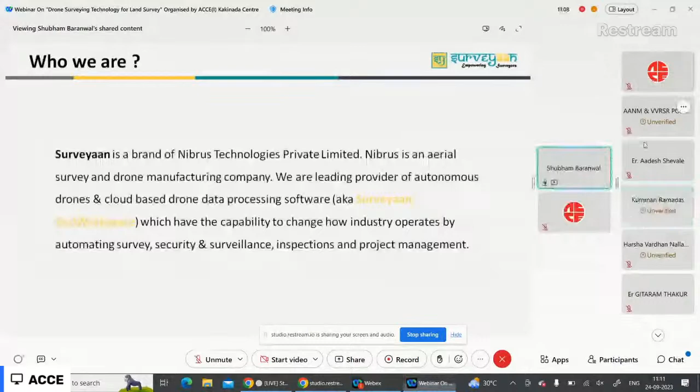Now, coming to this presentation, I would be talking about what drones are, how they are helpful over your traditional methods, what types of drone you need to choose when you are doing a land survey, and what the outputs are and how we can use them in our day-to-day work, mostly in AutoCAD. Fine.

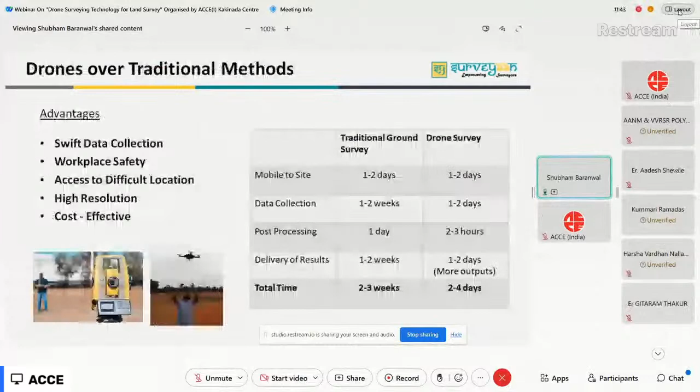So, as Durga sir already told about the traditional methods, there are several advantages of drones over total stations and DGPS. So this is a chart which we have prepared, and this shows that the drone works 10x faster than your traditional methods.

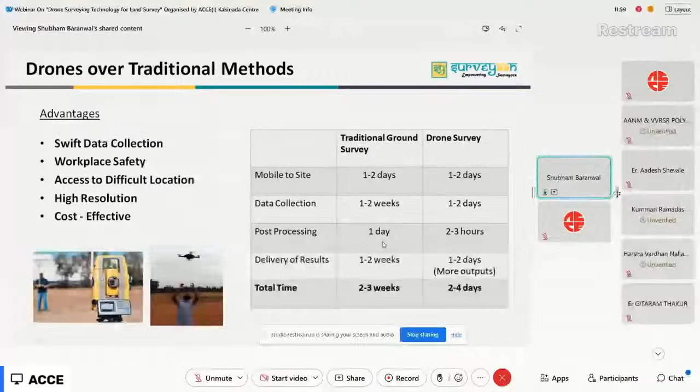The first thing is the data collection. It is where the difference comes in. Let's say for 100 hectares, you may need to work for 1 to 2 weeks to collect the data point by point, using total station or DGPS. Whereas this data through drone can be collected within hours only. Then to post process this data, you take another 1 or 2 days. Whereas this 100 hectares of data can be processed in maybe 1 hour or 2 hours.

And then the most important thing is the delivery of results. So to prepare the results, you need to plot everything in AutoCAD, and then you need to deliver it to clients. In drone survey, we get the outputs automatically with a very few clicks of a button.

Sir, some of the participants are requesting a little louder voice, sir. Okay. Is it fine now? Right, sir, carry on. Okay.

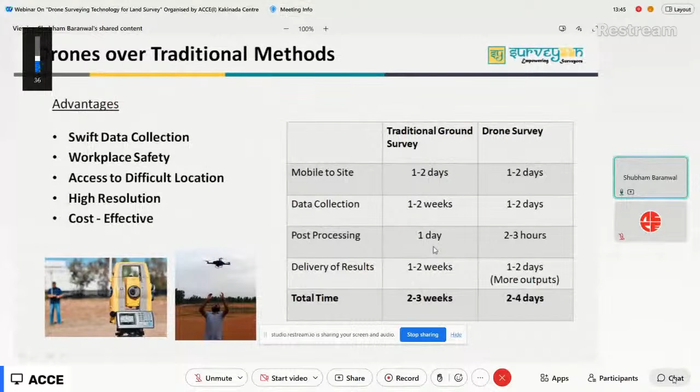So I'll just repeat. Sir has already told about what are the advantages of drone. Now I would just tell you where the difference lies between the drone survey and the traditional ground survey. The main difference lies in the data collection part. So when you go for a traditional method, let's say for a DGPS, you need to set a base, it takes many hours, and then you need to take points manually using a rover. Same is the case for the total station.

Whereas in drone survey, you set up the drone in less than 5 minutes, you plan the survey and you fly the drone. It would fly and capture data within few hours only. Then the delivery of result is where the main time goes. A person needs to do post processing manually, deliver the results, and plot everything on AutoCAD. Whereas in drone survey, the outputs and all the contours come automatically. So this is where the difference lies.

Definitely what sir has told is that data can be collected very fast. One important thing is the surveyors don't need to climb hazardous places or difficult terrains. They can fly drones safely, and the resolution produced by drone survey is 100x more than what we get from the traditional survey. And with all these advantages, we save our time, and ultimately this is cost effective.

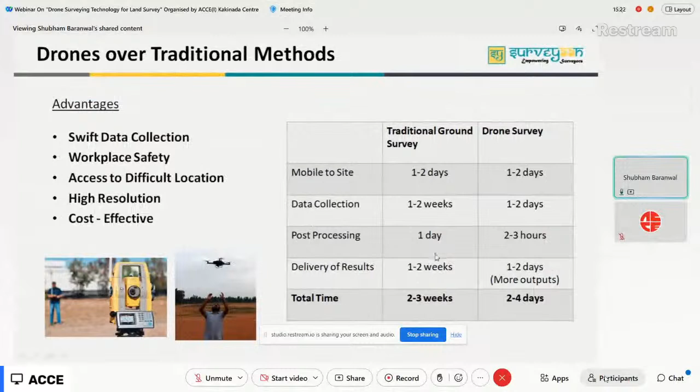Now coming to how this whole system works. You may find that drone survey is a very advanced technology, but we have made it so simple that you can set up the drone in less than 5 minutes. Then you generally have a ground control station software through which you upload your KMLs, plan the drone, control the drone, and ask the drone to fly. Then the drone automatically flies the planned mission. It collects the data automatically.

The data here means the drone collects photos. The drone acts only as a data collection medium, and the rest is done by the photogrammetry software. So the drone flies its designated path and collects the photos. Once the drone completes its mission, it lands back at its takeoff location. Now the surveyor has to come to the office, transfer the data, and upload it to a photogrammetry software, which I will explain later. And then he starts processing and gets the result. This is very simple.

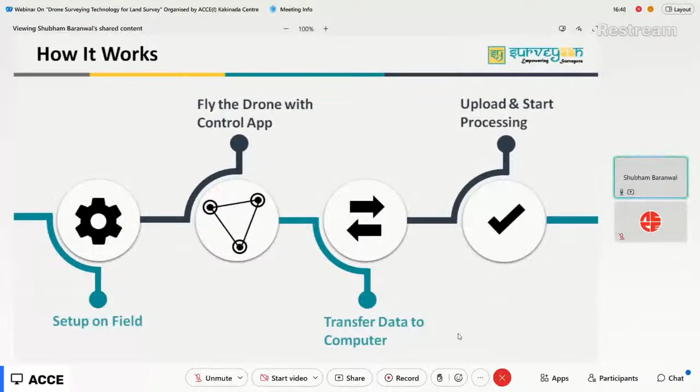So now I'll come to the type of drone you need to choose for land survey. First of all, make sure the drone is lightweight and capable of capturing more area in less time. Our survey drone can fly 25 to 30 minutes, and it can capture up to 60 hectares in one flight. So you can imagine, in 30 minutes you are able to capture 60 hectares, which is impossible with the traditional methods.

It should have a high resolution camera. Generally on the government side, you would be asked to have a 20 megapixel camera. We have a 23 megapixel camera. And the drone should be able to operate at high altitude also, so that it can capture more photos. You should also make sure the drone has important fail-safe features so that there is less chance of crashes.

So in our drone we have 4 to 5 fail-safe features, like the drone would automatically return to its takeoff location if there is a low battery, if there is a high magnetic or power interference. Now here the drone is acting as a data collection tool. So the important thing here is camera. So in case the camera is switched off or the connection gets lost because of uncertain reasons, the drone would return to its home location, because if the camera is off, there is no point of flying the drone.

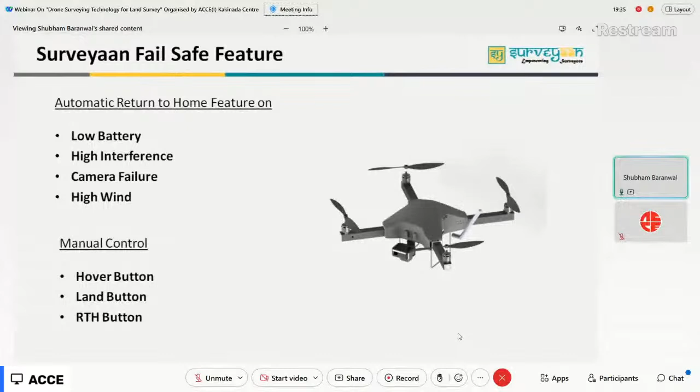Now comes the control application. So in drone survey, we have something called a ground control station. It can have a hardware and also a software. Our drone is completely autonomous and it is controlled by a GCS software which is available on the Android phone. So you need to log into the Android phone and connect it to the drone.

Now, in this GCS software, you would see a few parameters of the drone, like the battery, the number of satellites it is catching, at what height it is, at what speed it would be flying. Then we have the camera battery also, and a few more features, like you can calibrate the sensors of the drone if it is required. Then you can test the motors, you can test the camera also.

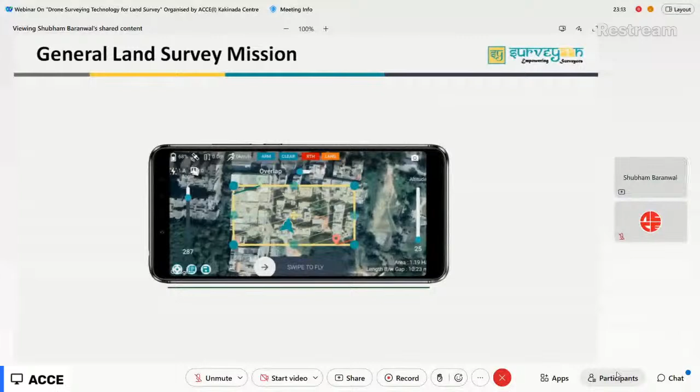Then the another type of mission is corridor mapping. This is related to your canal mapping, road surveys, or railway surveys. In the general land survey there was a polygon. Now in this corridor mapping, you would see there is only a polyline. So you need to draw the polyline, or you can upload a KML, and in this way the drone would fly to its designated area.

Okay. Now comes the rooftop mission. So this type of mission is a special type of mission where if you want to do a monument survey, or if you want to do a survey for a building, then this type of survey is considered. In this survey, let's say for a monument survey, a very high-quality 3D model is required. So in this survey,

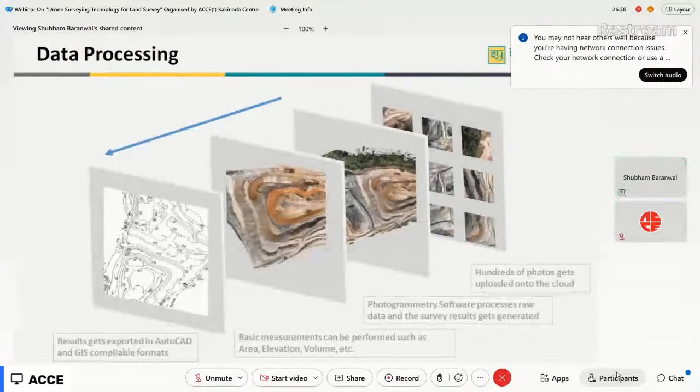Now these photos are stitched together: from the photos the features are extracted, these photos are merged together, and then a stitched georeferenced map is generated, and on top of it we get results like orthomosaic, DSM, DTM, and from there we could extract data which are AutoCAD compatible. So let me go through our software and tell you how this software actually works.

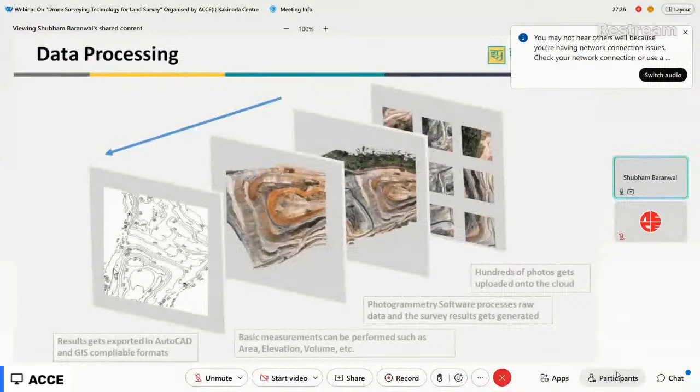So this is the Surveyaan software. Here you need to log in and you create a new project. You give a project name. You give a survey date. You give your phone number. Then you select the type of survey. I already told you about general land surveys and corridor mapping. So you need to select a general land survey, or maybe corridor mapping.

Now there are two types of surveys which can be done. Either you can do it without GCP, or if the client requires more accuracy, more precision, then you should select GCP. GCP has a little more workflow. I'll go with the without GCP part for the time constraint. Then you need to upload the photos. So I'll just, you can select your boundary also.

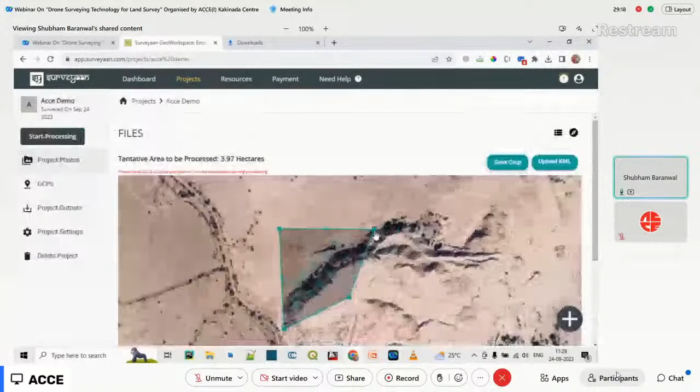So once the photos are uploaded, your work is over. You just need to click on start processing and the result would come out. This is very simple. So you have flown the drone, you uploaded the KML, you collected the data, and then you uploaded the data and gave a single button click, start processing, and it would automatically process and the results would come out within an hour. This is how easy it is.

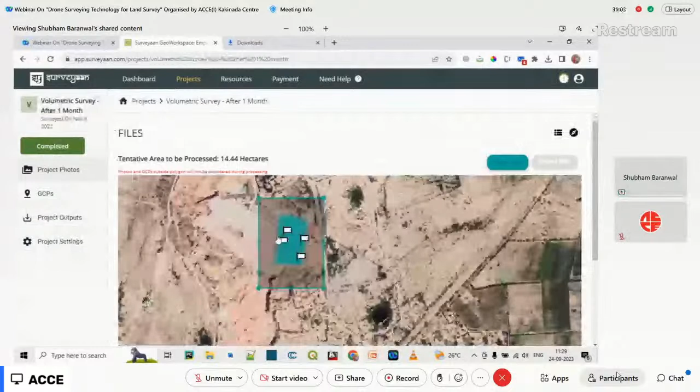Meanwhile, while it processes, I'll tell you about a project which we have already done. So this was a GCP-based project. You can see there were a few GCPs placed around, and I'll just pop into the output section. So the first thing you would see is a georeferenced 2D image. You can see there were multiple photos clicked on the site, and these photos are stitched together and a single map is generated. This is called an orthomosaic.

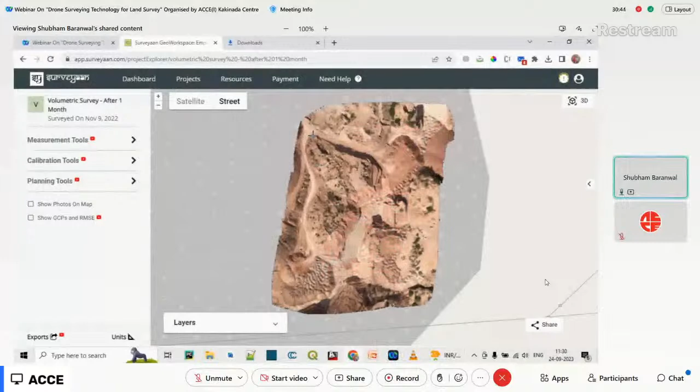Okay, so this is also a georeferenced image, which means it has latitude and longitude, XY, and then you can see the textures over it. You can see there are trees, there are roads going on. And the best thing is it can be imported into AutoCAD, which I will show you how to do. If it is imported into AutoCAD, you can easily digitize it.

You can easily see where trees are there, where trees are not there, where the road is going. So it is easy to plan out everything. So this is one of the outputs. Another output is your elevation model.

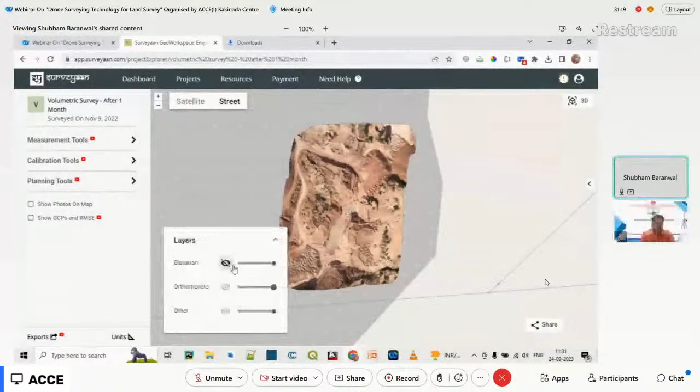Now this elevation model is also a 2D georeferenced image only. The difference between orthomosaic and DSM is that DSM contains the elevations of each and every part. So you would see it is ranging from 156 to 205 meters. So 156 is around here where you can see there is a low height, and at 205 you can see the height difference is more. So DSM, and one more elevation model is there, DTM.

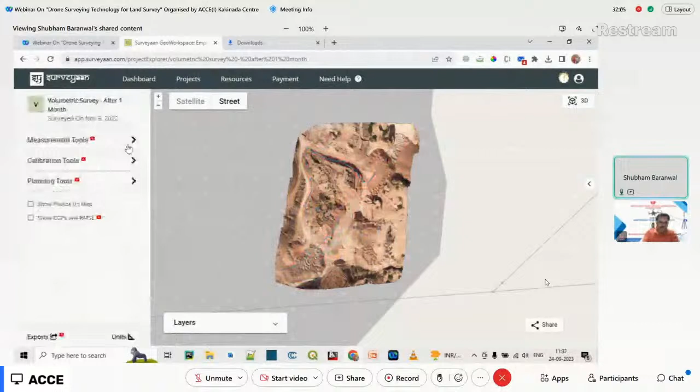So in these two you get elevation. Now, I am showing DSM; we have one more, DTM, also. So let me go one by one through some of the measurement tools. So one thing is you can have a location. The location can be anywhere. You can see northing, easting, the zone, and the altitude, which is calculated from the backend.

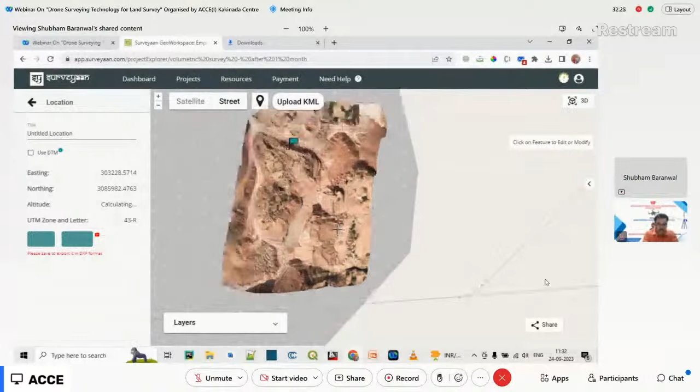So the altitude is calculated from the backend. It loads the DSM in the background and then it gives it. So you can see altitude is 195 meters. You can hover anywhere and the altitude would change accordingly. Whereas if you were using DGPS or a total station, it would be very difficult to get each and every point. But here, you hover anywhere, you get northing, easting, and the altitude.

The next thing is, since you are able to see the textures on the map, you can easily mark from where to where to get the distance. This way you can get the distance from any one point to another point.

Then comes the main part, which is the profiling, which many of us generally go for. So this way you would get a profile of any terrain. If you just click, you would see how the land is going. Now here I would tell you the difference between the DSM and DTM. I already told you about DSM.

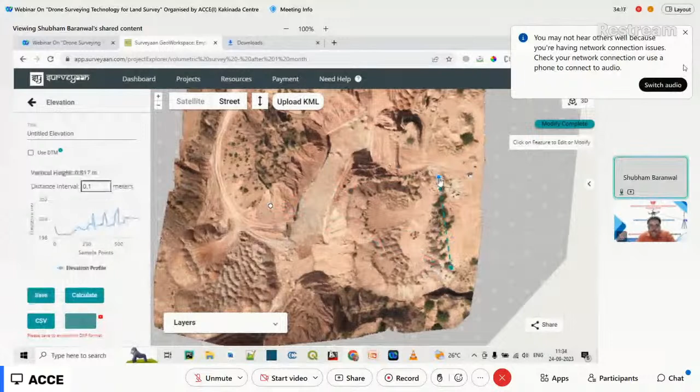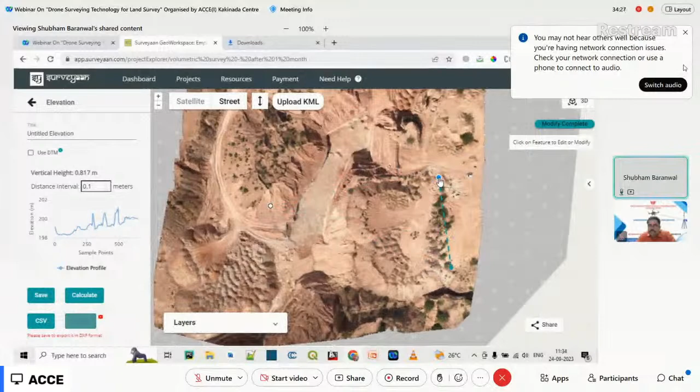DSM and DTM are the elevation models. So you get elevation with respect to northing and easting, or your coordinates. In DSM you would get your surface objects like trees, buildings, or any objects present on the ground. Whereas DTM tries to smooth out or filter out the objects present on the surface, like trees, buildings, cars, for that matter.

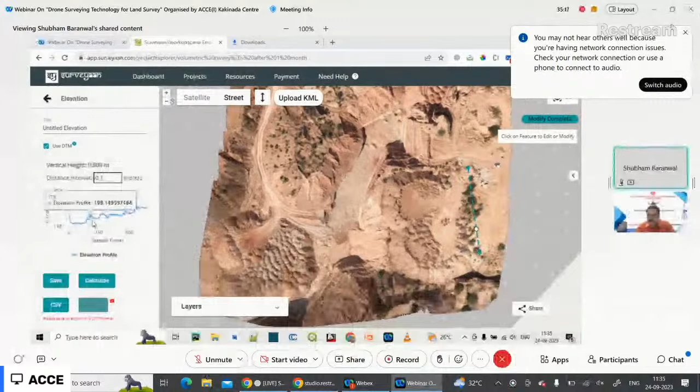So right now you are seeing an output using DSM. I'll just click and use DTM, and let's see whether the trees get filtered out or not. So you would see the trees have been chopped off. You can see the elevation is close to 199 only. Whereas with the DSM, you would see the trees are going around 200 meters, something like it. You can see it more clearly in QGIS.

QGIS is an open source software where you can import these DSM, DTM, and orthomosaic. I have already downloaded it. I will just show you.

I hope my screen is visible to everyone, right? Yes, sir. Visible, sir. Yes, it is visible.

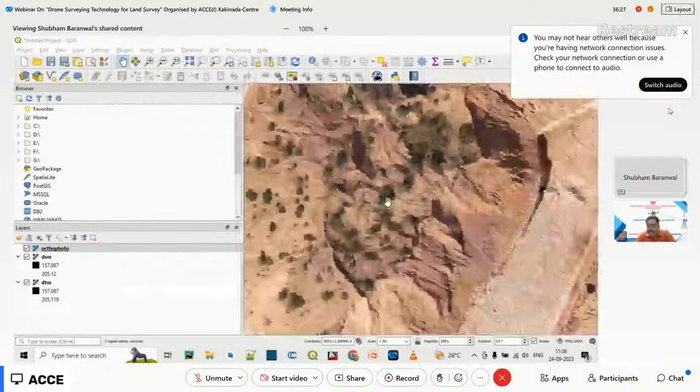Okay. So this is QGIS. Now you can see I have imported this orthomosaic here, and you can see the trees and all the textures of the orthomosaic. Now this is DSM. This is non-textured data, and here you would have elevation only. This is DTM.

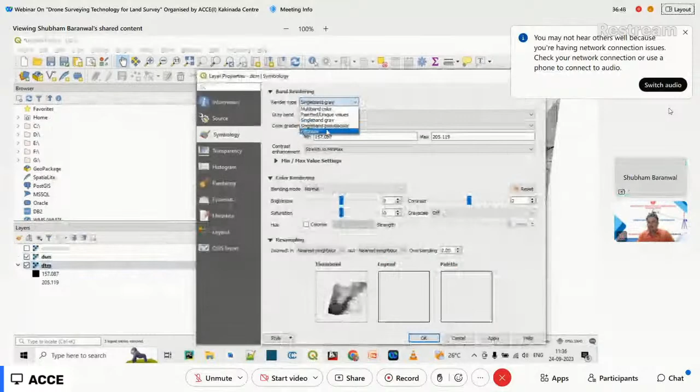So now when I unclick this DSM part, you would see there is some filtering going on. So this is what DTM is. In DSM, you would see trees and other objects present on the surface, whereas in DTM, you would see that things have been filtered out or smoothed out. So this is the main difference between DSM and DTM. And then this is the orthomosaic.

One thing I would like to tell you: I told you while flying you should consider the overlap and the altitude, and how it affects the orthophoto. The resolution of this photo can be determined by going to the properties, and you would see the pixel size. This pixel size means how many meters each pixel is. 0.0228234. This means every pixel you are moving 2 centimeters.

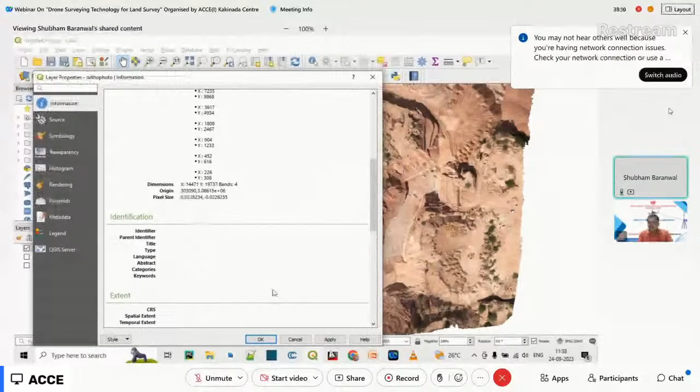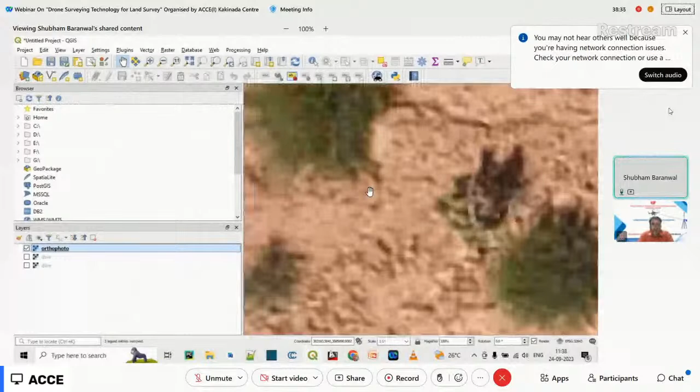Let me show you this thing. This is actually an image, so you would see it is made up of pixels. So when we say 0.02 meter per pixel, when you are moving from one pixel to another pixel, you are moving 2 centimeters. So this is what GSD means, ground sample distance. For the orthophoto, it would be high resolution. For DSM and DTM, it would be low resolution.

Now, I hope you are clear with this DSM and DTM, which are among the most important outputs of the drone survey. Now, after that, you can measure the... Can I ask a question, please? Yeah, sure.

This is Rajkumar. The KML and KMZ we do, is that a DSM and DTM? No, sir. KML and KMZ are different formats altogether. They are formats from Google Earth, and these are actually vector data. They contain points and lines, whereas DSM, DTM, and orthomosaic are continuous data. In KML or KMZ you would have points, areas, polygons. So altogether, those two are different things.

So this is based on the Google platform, and this is another platform, so you are calling it the DSM DTM, right? No, sir. DSM and DTMs are the outputs only. You have seen Google Earth, right? In Google Earth you would see a satellite image, which is a low resolution image. Compared with that, a drone survey gives very high resolution imagery of the same type, and on top of it you get DSM and DTM, which are geo-referenced raster or 2D data, where you get elevations at each and every point.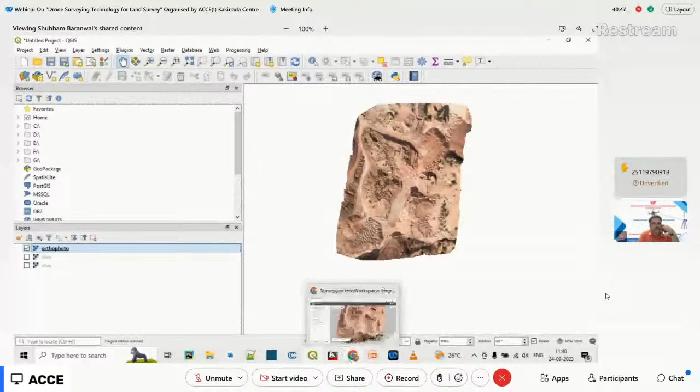So for this drone, do you have any specific configurations, or auto picking up of control points? Can any drone do it, or is a specific resolution drone required? So, sir, basically you need a survey grade drone to perform these types of survey. We recommend drones with high resolution, which perform better. And as I told you, you should consider fail-safe features as well, and the time taken. These things you should consider while choosing the drone. Any drone can perform, but it comes down to the quality of the photos it takes and how they get processed. Okay, thank you. I'll discuss with you in person.

Yeah, sure, sir. Now we can measure the area also, and similarly we can measure the volume as well. Let's suppose you want to measure the volume. You get a cut volume and a fill volume. Here we have different types of methods; you need to choose a base elevation. Above it you have a cut volume, and below it a fill volume. So there are a few methods through which you can get the cut and fill volume.

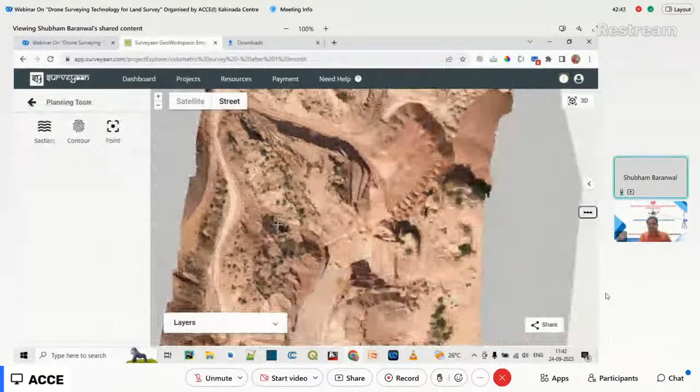Now comes the interesting part, which I think most of you are interested in: how to generate contours from this, how to generate grid points, or, for road surveyors, who are very familiar with the L-section, how to have an L-section. So I'll start with the contour part, how you can generate contours.

In contour, you can decide the contour interval you need. Then this area filter: since this is all computerized and the DSM and DTM are at a very high resolution, you sometimes get very misleading contours, like around very small pebbles. This can be filtered out using this parameter. Generally, 50 to 100 is fine.

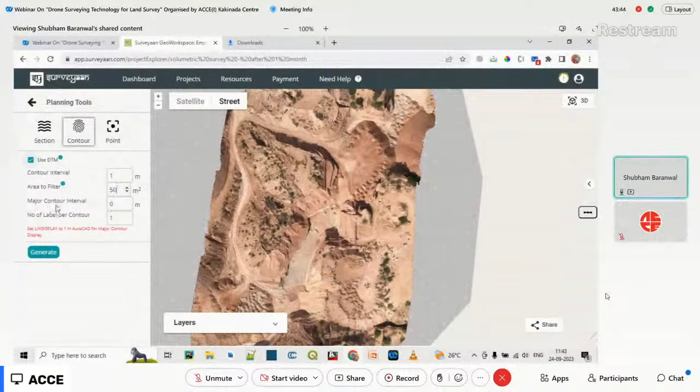Then if you want major contour intervals, you can set at what interval you want a major contour, and how labeling should be done per contour. Now what you need to do is just click on this generate button, and it will automatically process and give the results in a few seconds.

So you would see that it has been automatically generated. Let me just download the results. What is this software? Sir, this software name is Surveyaan GeoWorkspace. It is a completely cloud-based photogrammetry software.

So now I'll just move on with the contour part. So you would get three types of outputs. One is DXF, which is AutoCAD compatible. Then you get a PDF, and then you get a shapefile, which is GIS software compatible. So I'll just open contour in AutoCAD.

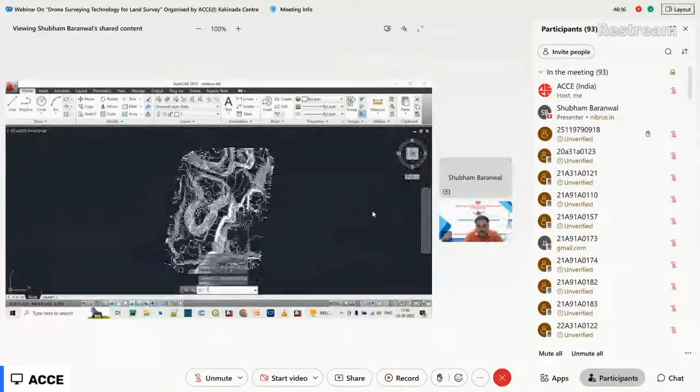So you would see contours being generated, and these are geo-referenced contours, and mostly these are 3D contours. So if you can see, these are 3D contours. And then we had the option of major contours. So at every 5 meters, the major contours are also generated.

These are labeled also. One thing I would like to explain is how we can import OrthoMosaic into AutoCAD. So this is an OrthoMosaic file which we can download through the software. Mosaic and AutoCAD, the boundaries are mismatching? Let me show you, sir. It is not mismatching.

I'll just tell you. So in AutoCAD, when you import OrthoMosaic, it is imported as a normal image only. Now we need to geo-reference it. So we get a world file with it, and the world file would give you the coordinates, it would give you the resolution, and it would give you the coordinates from where to where the map has to be aligned. So in this we have a tool called GeoRef IMG through which it can be aligned.

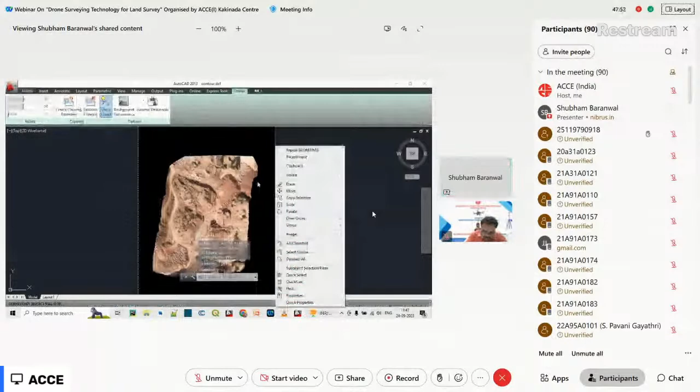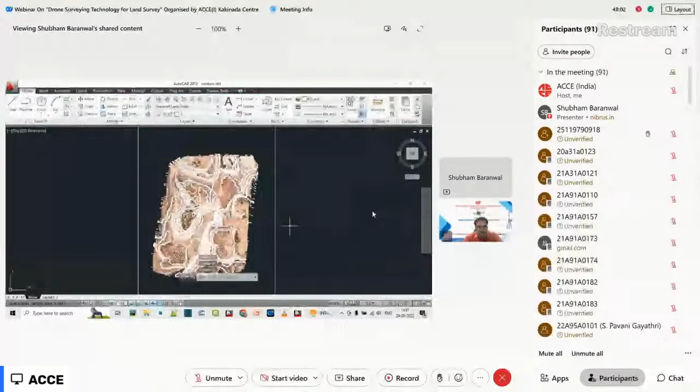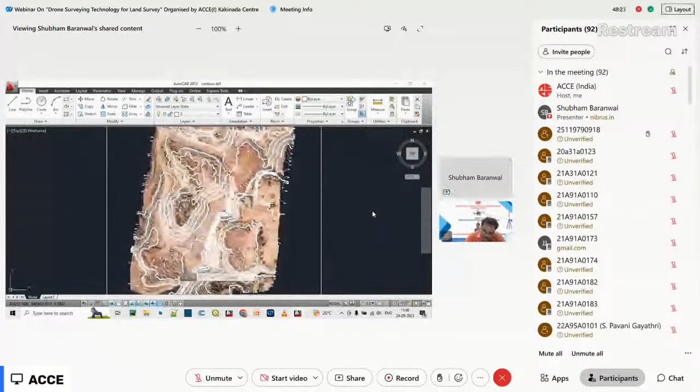So now you would see the contours have been aligned with this OrthoMosaic. So this is how you can import OrthoMosaic, and you can generate contours also. The good thing here is when you import OrthoMosaic, you can see trees, you can see the roads and all going on. So when it comes to digitization, you can easily use your AutoCAD tools and mark the ortho mosaic and plan very easily. So this is one part of contour.

Now, if you want to generate a grid point. Let's suppose sometimes you want to use some other software also, and you just need to import grid points at every, let's say, 10 meters. So you can do that also. So this is also done automatically. You just need to select your parameters and click on this generate button. In this you get an AutoCAD compatible format, a shape file, and we have a CSV file also.

So let me open a CSV file first. So here you would get your X, Y, and Z. So at every 10 meters you are getting an elevation. So this is X, Y, Z in CSV format. So you can see almost 620 points have been generated. Now I'll open the AutoCAD file.

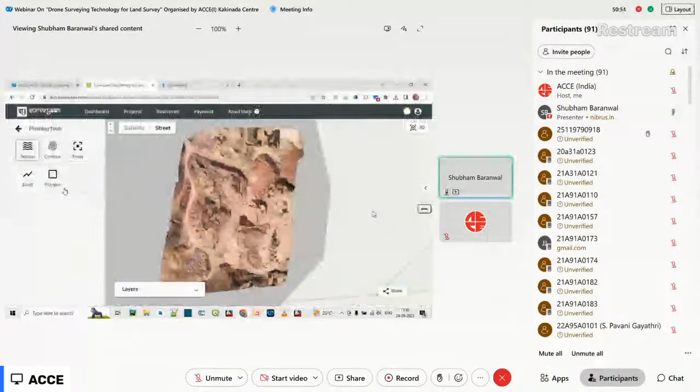Now comes another interesting part, which is mainly for road surveyors or railway surveyors where corridor mapping is used. So we can generate an LC section also. So let's suppose you want to generate an LC section, you can define how many L sections you require and what should be the gap between.

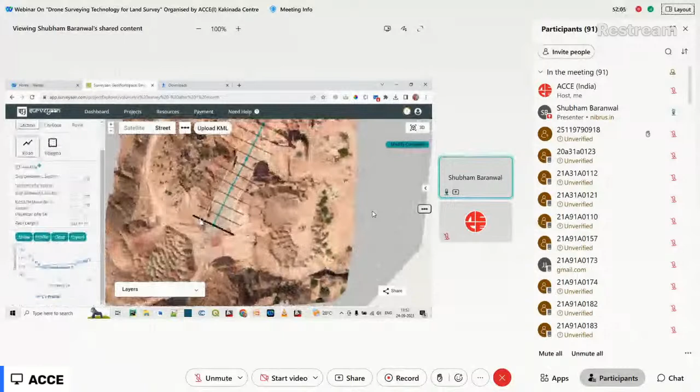So you can see in this way the profile would be given. There are 3 L sections and there are multiple C sections. Then you click on this profile button and you would get the profiles of each and every section. If you click here, you would get a profile like this. If you click on the L section, you would get a profile like this. And the good part is you can export it also. So a lot of CS and LS problems are sorted, I hope, sir.

So all these things are available 24/7 in this software. This is like your own software. Multiple team members can work on this at the same time. It can generate automatically. When it comes to cloud-based online software, you don't need to ask someone, okay, give me this format, give me this format. Everything is available at the fingertips of the user. So in this way, you would see the LC export section is there. We have exported the LC section. Okay.

So in this also we have three formats. One is the PDF format, where you would see the L section and C section. The naming is there: L1, L2, main, C1, C2, C3, and the profiles are there. This is just the PDF part, where you would get all the profiles. Then we have a CSV format also, where you would get the section name, at each distance what is the elevation, what is the easting, northing value, latitude, longitude value.

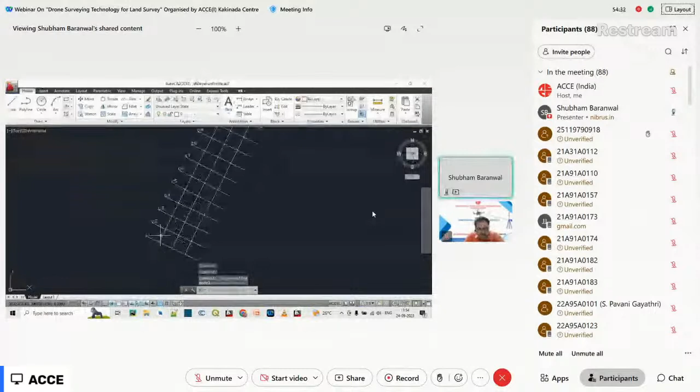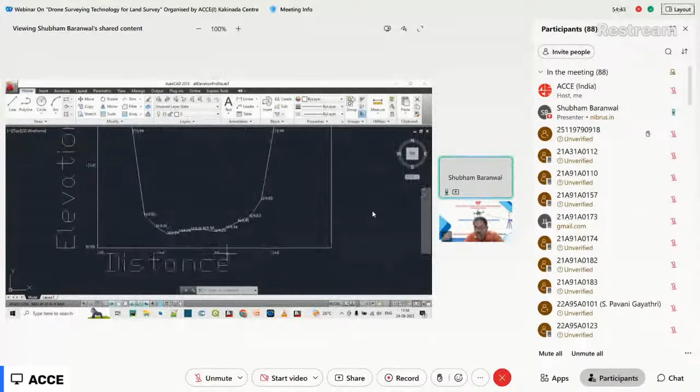So let's say for C1, these many points were generated. So at each and every distance, like at 18, at 20 meters from the left and 20 meters from the right, the distances are given. In this way C1, C2, C3, L1 and L2, and the main are given. And another thing is the AutoCAD compatible format. So you can see these are the C1, C2, L1, L2, and we have the profiles given. Like the C1 profile at each distance, how it is moving from -20 to 0 and so on. So the profiling is also done.

So this way you can generate the L section, C section. Sometimes we need a cross section of a particular area using a polygon also. So that also can be done. You can define vertical lines also if you want, so you can get the vertical lines also. And in a similar way, you will get the profiles of each and every section. And the same way you need to click on export, it would automatically compute at the backend and generate.

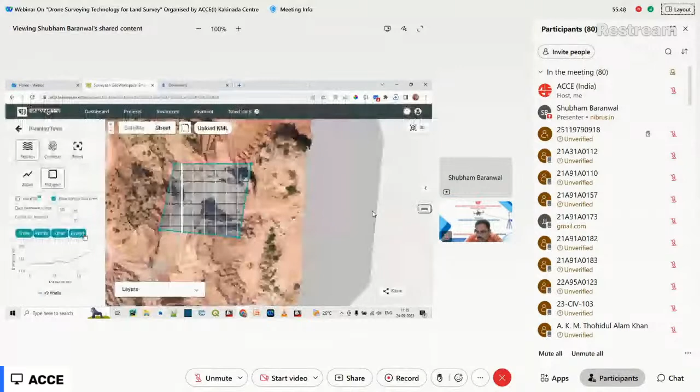So the same formats you get here also, like CSV, DXF, and the PDF file. So the format is the same. Just this is the cross section of a polygon, and that was a cross section of a polyline. So that was the difference. So these are some of the planning tools which can...

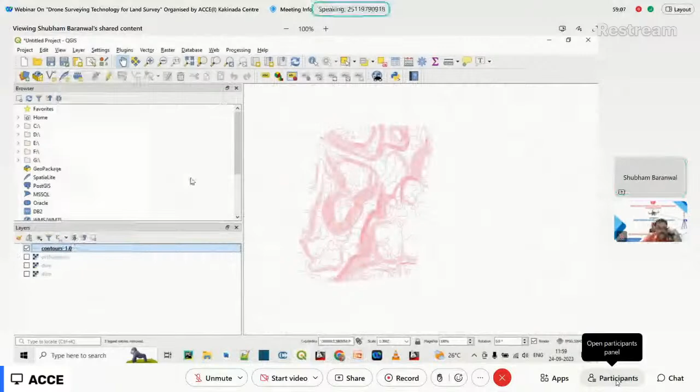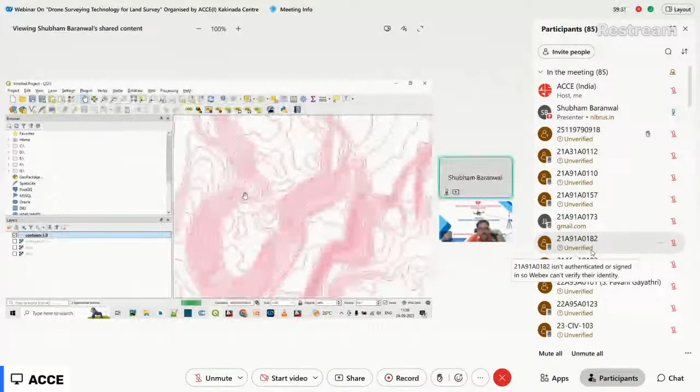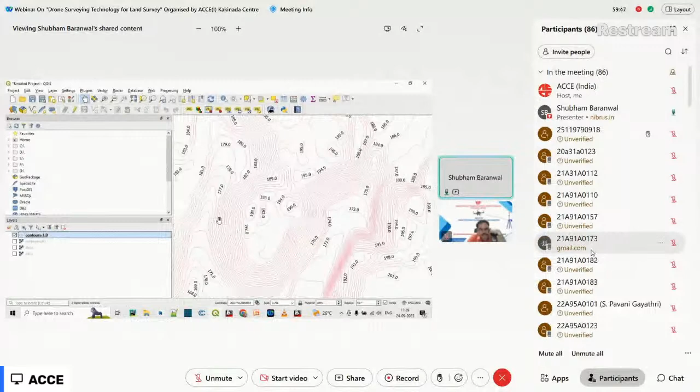So you can see this is a very generic shapefile, and it can be imported in any software. Mainly we gave DXF because mainly people work with AutoCAD. Then of course CSV, and this shapefile is a very generic format which you can import in any GIS software, and CSV can be imported in any other software.

So these are a few things. Now I'll tell you, like I told you, about the GCP and without GCP. So this project was processed using GCP. So in that you need to first give the data of GCP, and based on the accuracy of the GCPs or the DGPS collected, you get the accuracy of the drone output also.

So here we placed around 4 GCPs, and you can see we get a GCP report also, and you can see the error in X, Y, and Z is 1.88 centimeter, 1.34 centimeter, and 12.4 centimeter. This is completely based on how accurate your DGPS is. So one of the things is the clients ask for the GCP report also, and this way you can generate a GCP report automatically.

Sir, by using Google Map, you are able to draw contours and also area and the labels also. What is the difference with your software?

Okay, so sir, first of all, using Google Earth, you get a very low resolution image of any area. When you see the drone imagery, it is very high resolution. The resolution can be in meters level when it comes to Google Earth, and when you compare it with your drone, it is very high resolution.

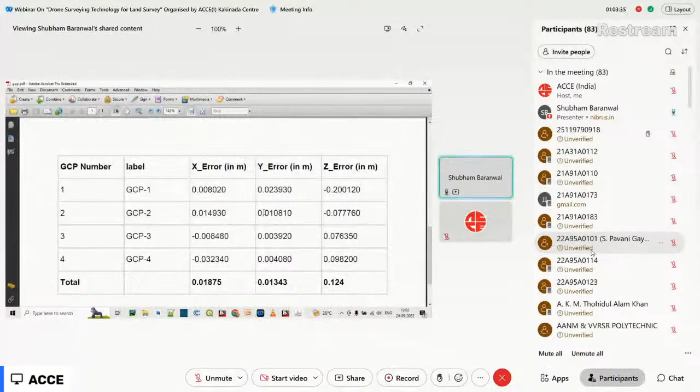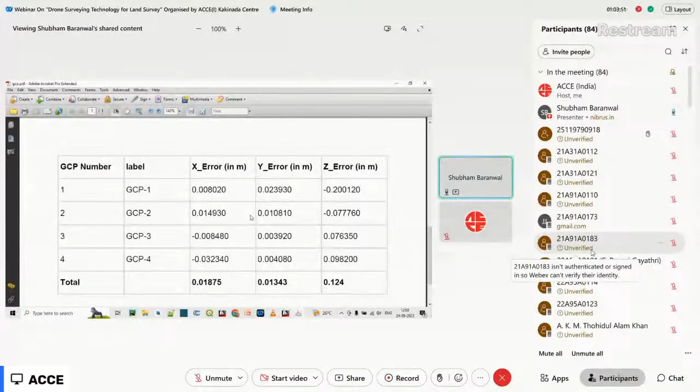This can be due to the fact that if many people are using DGPS, you may get a float solution in one and a fixed solution in others. So all these things can relate to high or low GCP errors. Then we have a shapefile also related to this. This can be imported in open source software. So you can see these are the GCPs after processing.

Okay. Now in this, I was working in the UTM format. You can also have different units. Let's suppose you want the position format in decimal degrees, for instance, you want things in latitude, longitude. That way you can get the things in latitude, longitude, or if you want degree, minute, seconds, that also you can do.

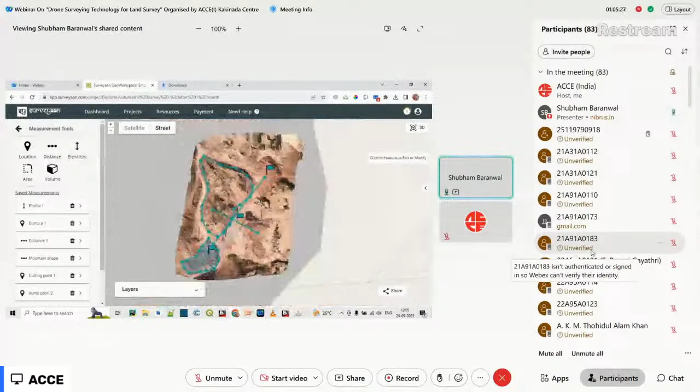So you get it in degree, minute, seconds also. One thing. Let's suppose I have marked all these things. You can mark many more things here according to your needs, and if you want, you can export it to your AutoCAD also. Now there is an export all button.

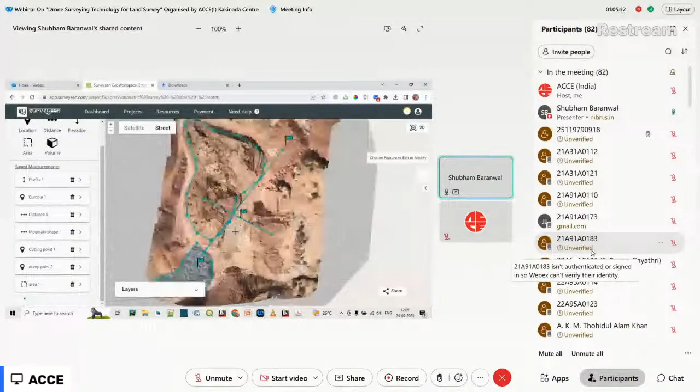If you click here, you would get formats like DXF and shapefiles, and then you can import it in your AutoCAD. So you can make all the drawings and all the planning here also. If you want to mark a road or any pit, you can do it, save it, and after that you can export it.

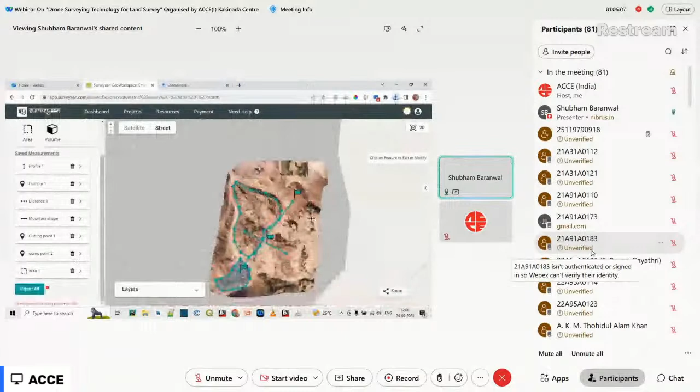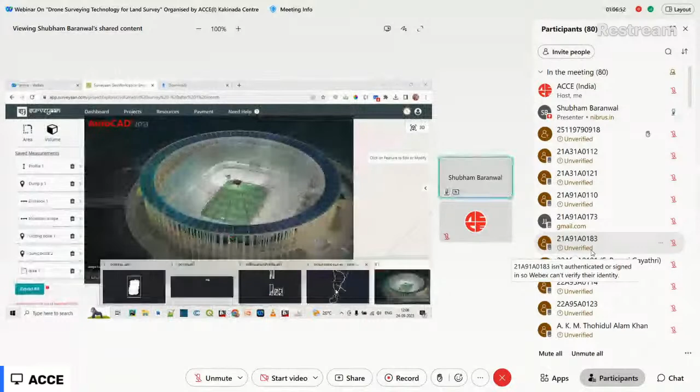So you would see that whatever markings were done here are reflected in AutoCAD, and these are also geo-referenced.

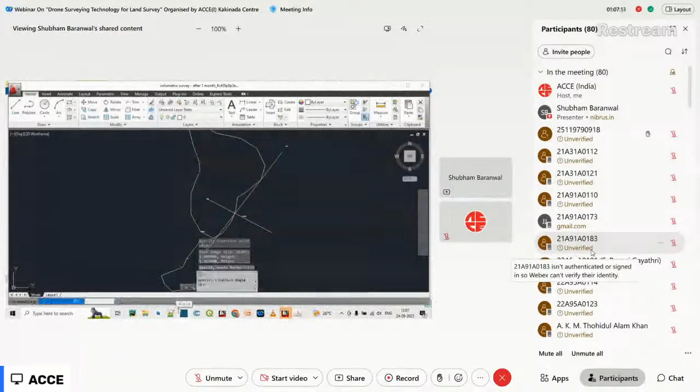You can import the ortho mosaic in the same fashion. You use a tool called GeoRef IMG. You select the ortho mosaic and it would be aligned. So you would see whatever markings you did on your software can be imported here also. So this is one of the features.

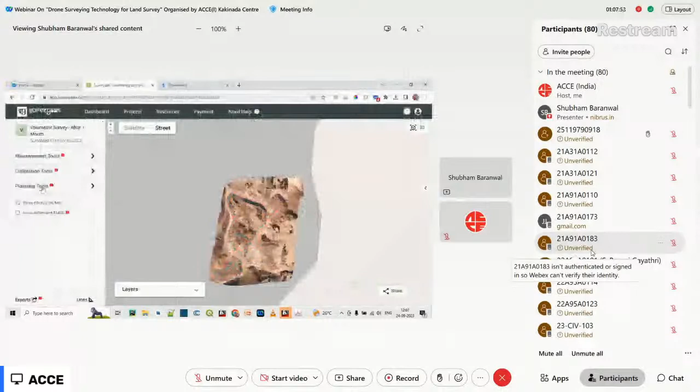Now I have told you about three things: ortho mosaic, DSM, and DTM. Another thing is the point cloud. When it comes to DGPS or total station, you take points at, let's say, 10 meters or 20 meters. But in a drone survey, these points are generated in such a way that you get points at every centimeter level.

Let me show you a point cloud, where you would see it is a 3D format, but it is made up of billions and trillions of points. So I have a software called Cloud Compare. This is also an open source software, and you can use a point cloud file. They can be in different formats like LAZ, LAS, PLY, etc. So I'll just import this here.

So for now you would see it is an ortho mosaic when you see it from the top. Now you would see this looks like a 3D model, but in fact it is made up of very tiny points. Let me zoom in. So as I zoom in, you would see points coming out. So these are made up of billions and trillions of points. So you can think how accurate this would be when you are moving from one point to another point.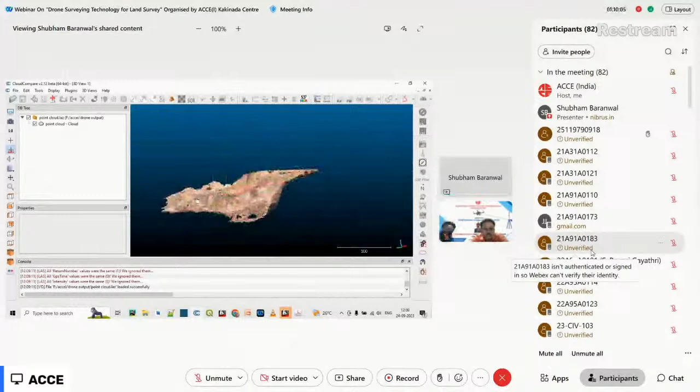So this is one of the outputs of the drone survey, a point cloud. Generally, a client asks for this in LAZ or LAS format. So you can see at any point, it is made up of so many points. So this is also one of the formats.

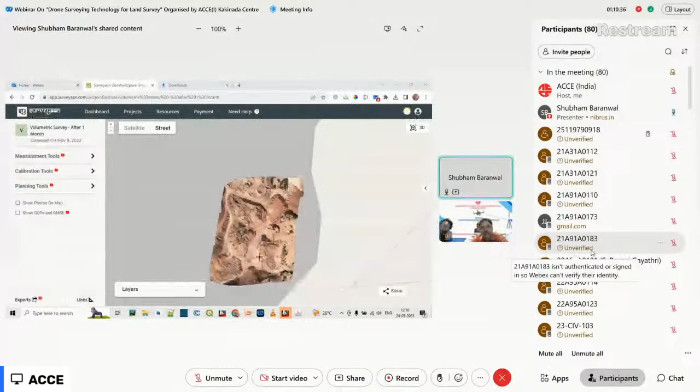Now there is another format, a 3D model format. So generally clients ask how my mine is looking, or I need it for a marketing purpose. So for that you have a feature in our software which is a 3D model where you can view the 3D model of any project which you have done. This takes time. I have already downloaded it, so I will just show it in a Windows software. We have a software called 3D Viewer, and you can import the files of the 3D model here.

So this 3D model is a big file. It takes a little bit of time just to open up. So you can see now the 3D model has been imported. So it does not have points. It would just be a mesh and the 3D model. You can see here. So this is also one of the formats of the drone output.

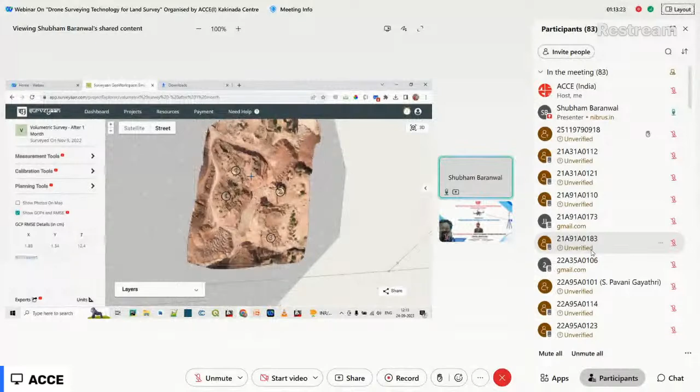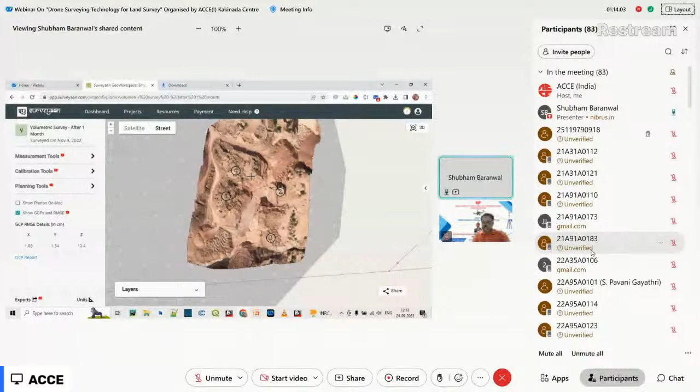Now, since I was talking about GCPs, there are a few things which need to be kept in mind when we use drone and the GCP. There is a norm: you should place only 4 to 5 GCPs per 100 hectares. So there should not be many GCPs placed in the mine, or let's say the designated area, because it does not increase the accuracy that much. A limited number of GCPs can also increase the accuracy. The points should be kept at places where there is an abrupt change in the elevations. So these are some of the things which you should keep in mind.

And then this is the export section. You can have the ortho mosaic I told you about, so you can click on this export and you can download the file. So I'll just pause it now. Similarly, we have different options. I told you about the world file, which is important to import it in AutoCAD. So you can download the world file. Now, if you want the result in JPG format or PNG format, you can download it through here.

I told you about the ground sample distance, the pixels. So this was each pixel of the ortho mosaic. The main result was generated at 2 centimeter per pixel. But higher GSDs are basically used because the lower the GSD number, let's say 2 centimeter per pixel, the larger the file would be. So the 10 centimeter per pixel file would be small. So for planning purposes, you can use the 10 centimeter per pixel file.

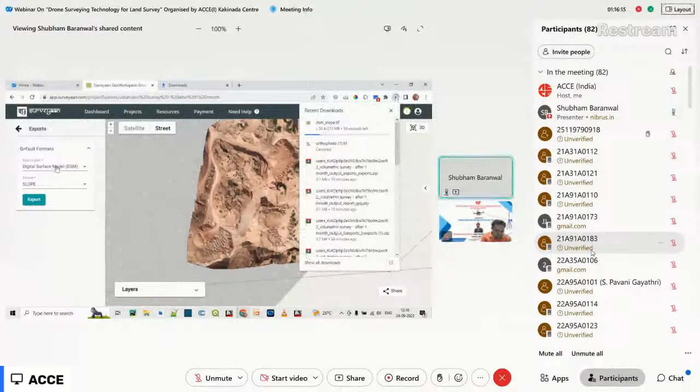Similarly, I told you about the DSM and DTM. You can download the DSM and DTM from here. One format we have is the slope map. This can be used for planning purposes. I'll just show you what a slope map is also. It tells you the instantaneous slope at each and every point. Then we have the point cloud and the 3D model which I have shown you, and then we get a project report.

So in the project report, you get the project name, you get the total area processed, like how many hectares it was processed, the number of points you get. So you can see here it had close to 50 lakh points. You can see the GSD of the orthomosaic and DTM, how many photos were there, the photo which was used here, the resolution of the photo, and what type of position reference was used.

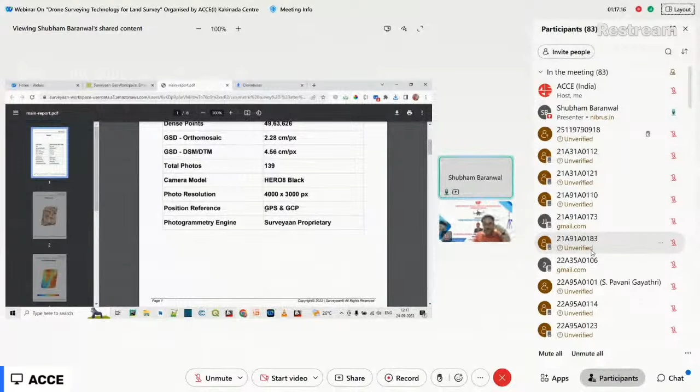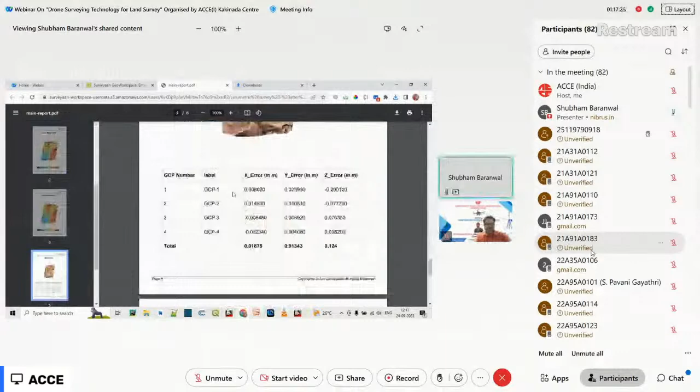If only GPS is used or it is processed without GCP, you would see here only GPS. Whereas if you use GCP, you would see both. Then you would get the orthophoto in PDF format, DSM, DTM, and the GCP report. So this is the report, and I would just show you a slope map also.

So in the slope map you can see the variation in the elevation. It gives you the instantaneous slope of each and every point with respect to its nearby neighbor values. So you can see how the terrain is moving from one place to another, how the slope is calculated. So this is one of the formats.

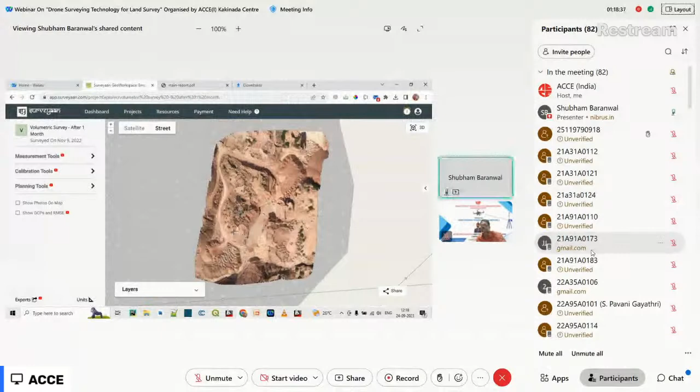So altogether, this is everything related to the drone survey, the ground control software, and the drone outputs, and how they can be made compatible with our day-to-day working using AutoCAD compatible formats, CSV formats, or GIS formats. So I'll end my presentation with a small video.

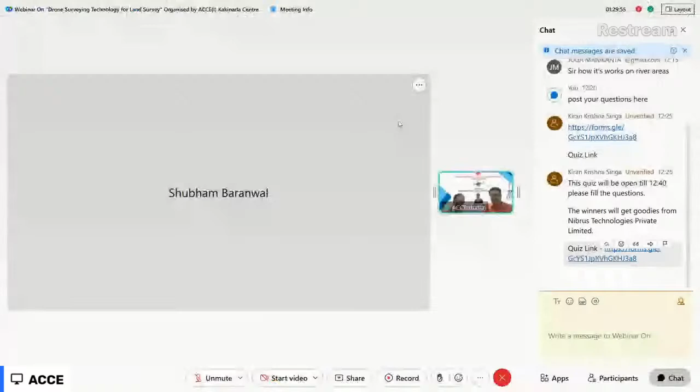Do you take up the job work of doing surveys? No, sir. I just want to let you know, we definitely do not take any job work. We are pure manufacturers and pure developers of the software. There are many companies in the industry which are manufacturing and also providing services, which we find a little unethical, because I am the supplier also. I can manufacture at a lower price than what I am providing you, and then if I compete with you, it would be a little unethical. I supply you the drone and I compete with you in the tenders also.

So in general, we are just a manufacturing company, and whatever job work we get, and we definitely get a lot of job work, we redirect it to our clients, and our clients do the job work.

Generally, what will be their charges, sir, per acre or per hectare? How do they charge? Sir, it completely depends. It cannot be generalized, because it varies region to region. If the area is small, the charge would be more. But if the area becomes large, the per hectare or per acre charges become a little less. It completely depends on the client, the nature of the work, and the nature of the output required.